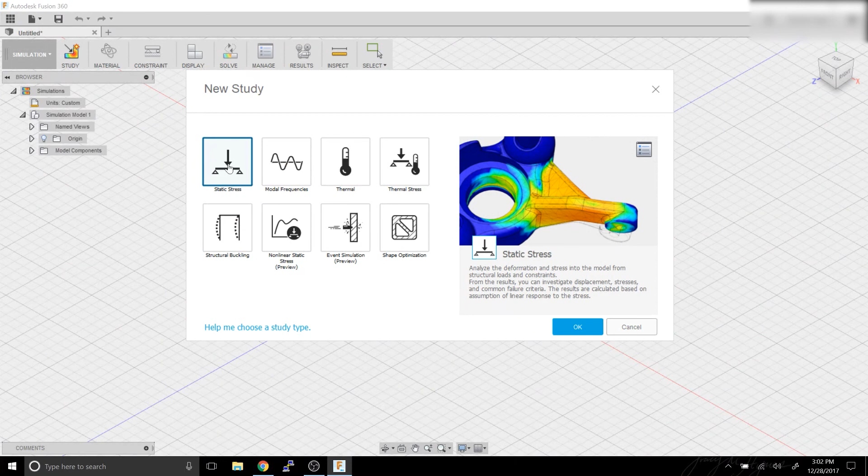So we're going to go ahead and mock up a quick test tank here. To do this, we're going to need to make the actual model, but before we do that, we're going to have to make a material. We're going to go to model and we're going to go to simulation. Static stress test is what we're going to be doing.

And under material, go to manage physical materials. Now the reason we have to do this is for plywood. Plywood is a complex material that this system just cannot handle for stress tests. There's too many variables in it, and we only really need a couple of them.

So what we're going to be doing is going down to wood, going to plywood finish, and hitting this little up arrow with the pencil, and that'll give us a copy of the plywood finish here. Now when we look at the physical properties of this, you can see it has separate X, Y, and Z properties, and they're identical for everything except shear modulus. And the shear modulus is whether you're going against the layers or into the ends. And we're going to be doing into the layers, so this is the one that we want.

So what we're going to have to do is make a material that has less properties so that this can actually work with it. To do that, the easiest thing to do is go to plastic, just pick something like the acrylic. Doesn't really matter what you pick. Ended up with acetal resin accidentally. Doesn't matter. Acrylic clear. And you're going to rename this to whatever you're going to end up using.

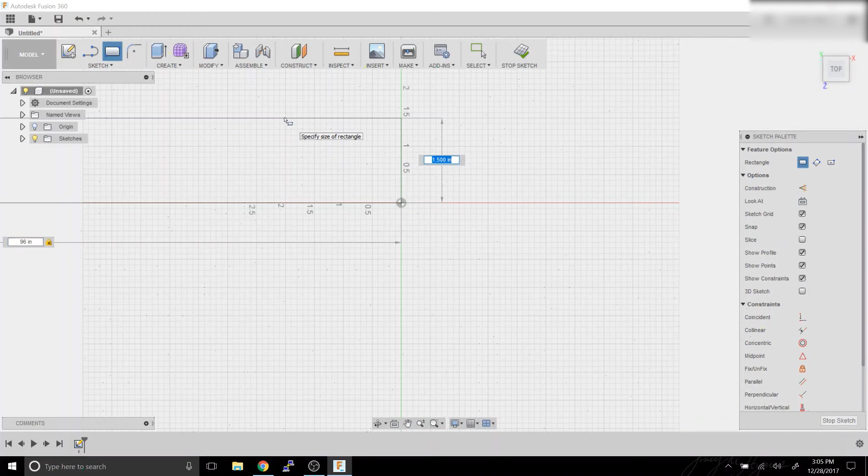So we're going to go ahead and start constructing our tank. We're going to create a sketch, and we're going to put it on the floor plane here. We're going to make a rectangle, first corner in the middle, and then we're just going to type in the dimensions. So this one's going to be 96 inches long and 48 inches wide.

Scrolling in the program is the mouse wheel. If you click and hold the middle mouse wheel, you get the pan tool. Alright, so we've got our base.

Now we need to make an actual base out of it. Normally when you do a plywood tank, you do doubled up plywood for the base. So we're going to go ahead and go to modify, press pull, and we're going to do a thickness that is 2 sheets of plywood. Now normally 3/4 inch plywood is actually 23/32, which is 0.71, so we're going to do 1.42. And that gives us, if we come up here to the home, a thick sheet for the bottom.

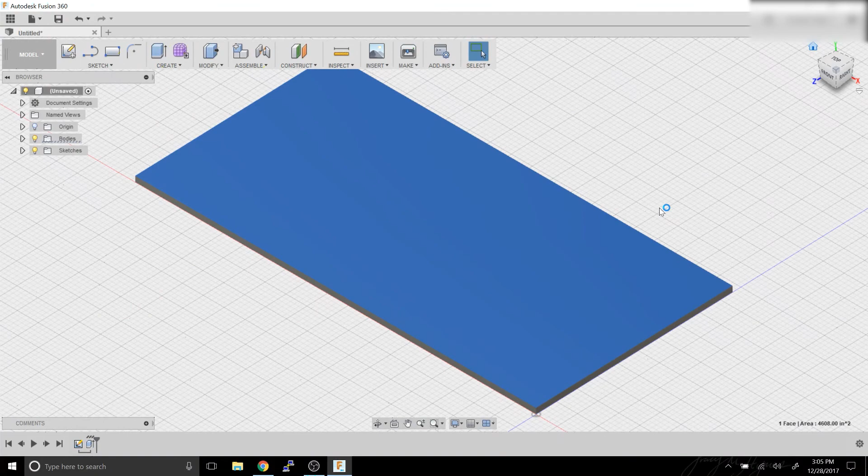I'm going to go ahead and do this again, sketch on the new top surface. And we're going to create a box that's the full width.

Then we're going to shrink that box down by the width of plywood, so we have a single plywood thickness wall. Now that's a bad idea, but I'm going to do this just so I can show you how this program works and how we can modify it later.

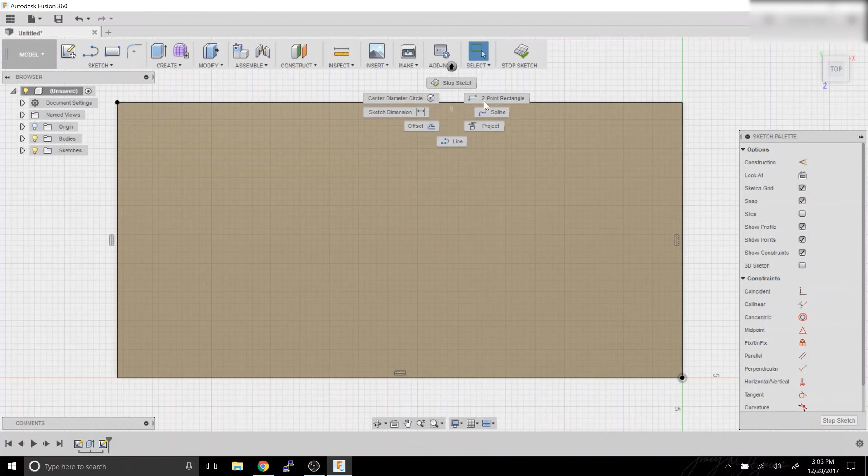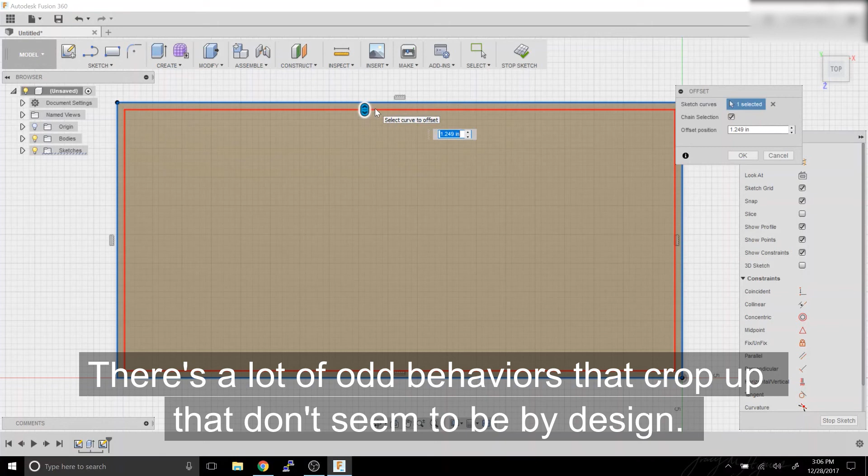You're going to right click anywhere, go to sketch, go to offset, and pick this box we just made, and we're going to move it in. Now, it's a good idea to move it manually by dragging so that you know if you need a positive or negative number, because the program does randomly assign that. We're going to go ahead and do 0.71 for our plywood.

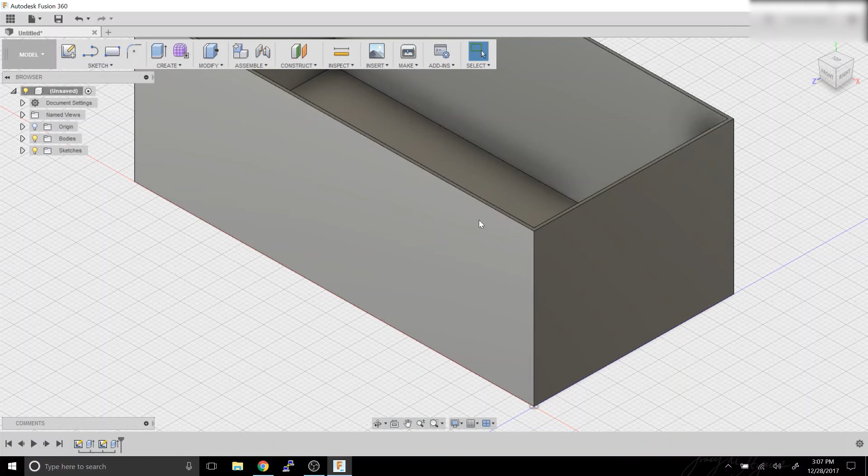And then once again, we're going to go to modify, press pull. I'm going to select this edge we just made, and let's make this tank 36 inches tall. That seems like a good number to me. Now at this point, we've got just a box. We need a window, or it's not going to do us any good.

So we're going to make a new sketch on the front of the box. We are going to try to come up with a good size. I like the idea of using a 24 by 72 inch window. That's a standard size of acrylic you can get. Now this is 96 inches wide, and we're not doing a uniform spacing, so I'm just going to separate this off a little bit. I'm just going to make a 12-inch box over here.

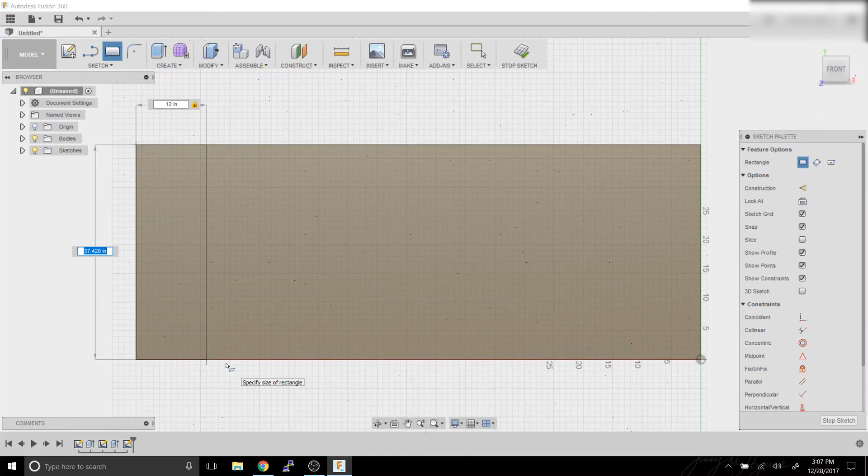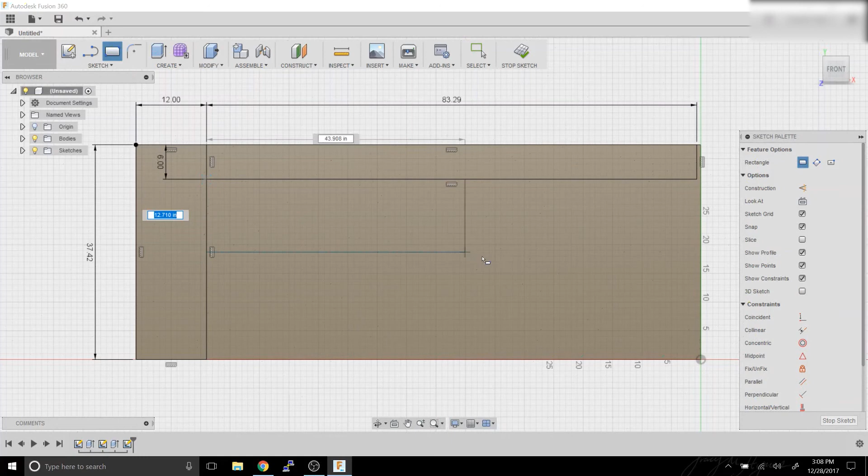36 inches tall from 24, so we're going to do a 6-inch gap at the top. Then we're just going to drop in our window starting in this corner. Now we're doing the size of the acrylic, not the size of the hole. So we're going to do 24 by 72.

That looks pretty centered. There's a little bit more of a gap on the bottom because of the 1.5-inch plywood, but I don't really want to factor that in. Now we're going to do the same trick we did earlier. I'm going to right click, sketch, offset, select this box we just made, and we're going to give this 1.5-inch lip that the window will actually be bonded to. So we're going to be working with this inside square here.

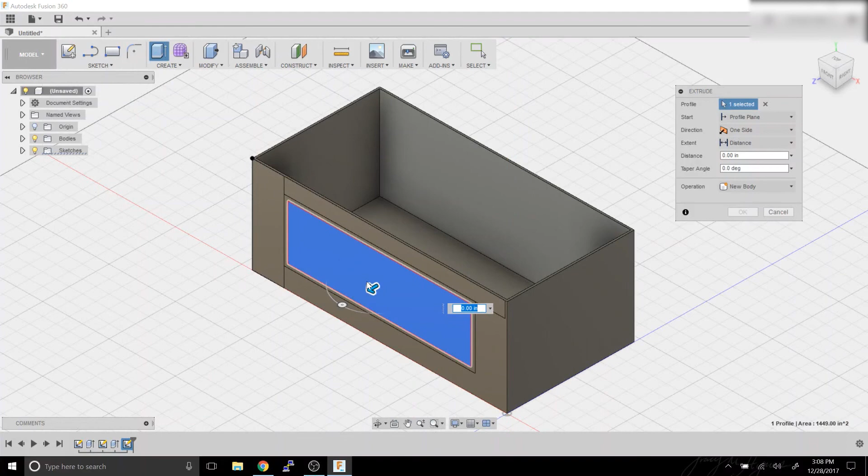Now, in order to cut, you go ahead and press pull. The shortcut key for that is Q. And you're just going to drag this the other way. It turns red, and the operation becomes a cut. And that'll give us a window.

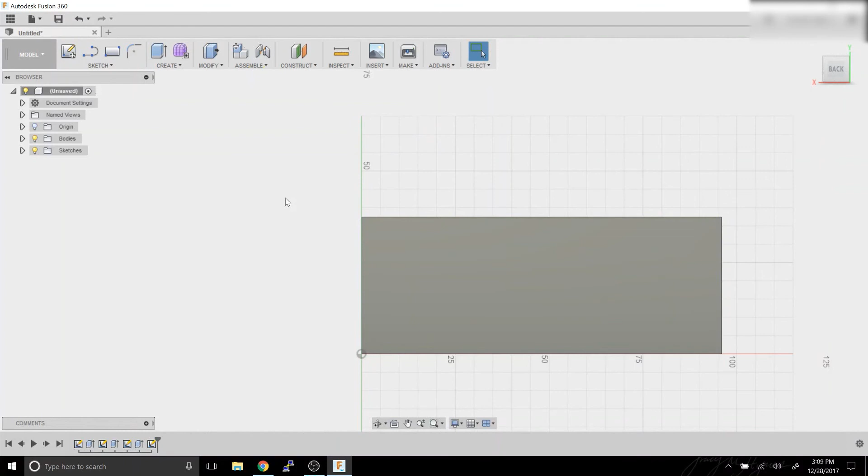Now we need to make our acrylic sheet, so we're going to flip the box around using the rotate tool down here. Hit escape when you're done to get rid of the rotate tool, and we're going to make a new sketch on the inside wall. Now, because this box is in the way and we can't really see what we're doing, we're going to go to bodies and turn off body 1.

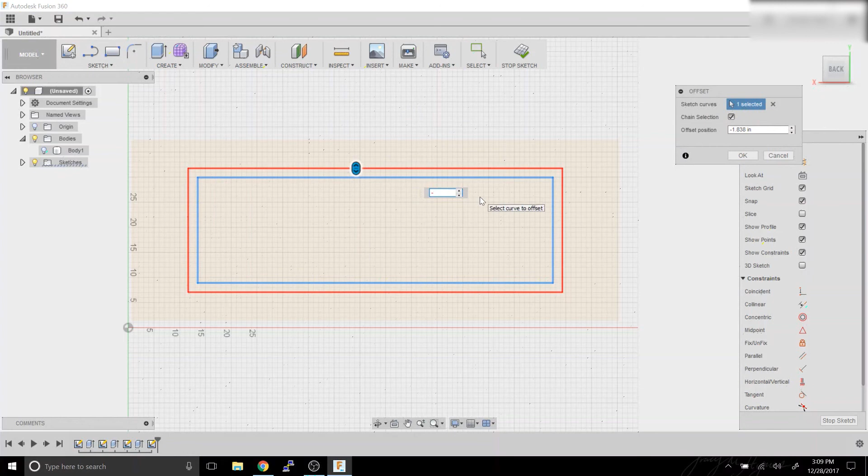Now, we've already got a selection here for where the hole is, and we know we need a window that's 1.5 inches bigger than that. So we're going to go ahead and go to sketch, offset. I'm going to click this hole that doesn't exist, and we're going to offset it by 1.5 inches, but now the numbers become negative. So negative 1.5, and that now gives us a 24 by 72 inch box.

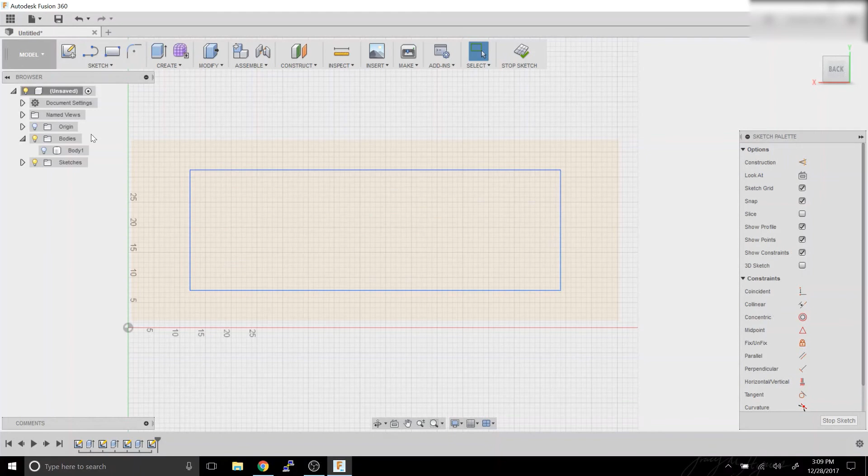Now in order to work with this, we have to select this invisible section in here and start deleting the lines, or we're just going to get a border. And there are 4 of them. So just go through and remove them. And we're going to turn our body back on. We're going to go back up to a view back here.

Now when we make the window, again you're going to press Q for press pull. Let's go ahead and make it 3/4 inch acrylic, so 0.75. And we want this to be a separate sheet or a separate unit than the rest of the body because it's a different kind of material. So under operation, we're going to change this to new body and hit OK.

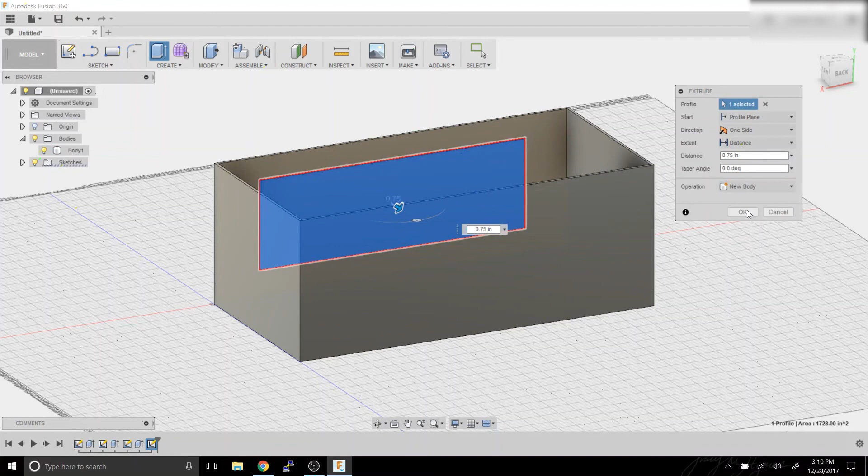So there we have our basic box. We now need to assign the materials to this so that the program knows what to do with it. So right click on body 1, physical materials, and we're going to go to plastic, acrylic clear, and we're going to drag this to the window.

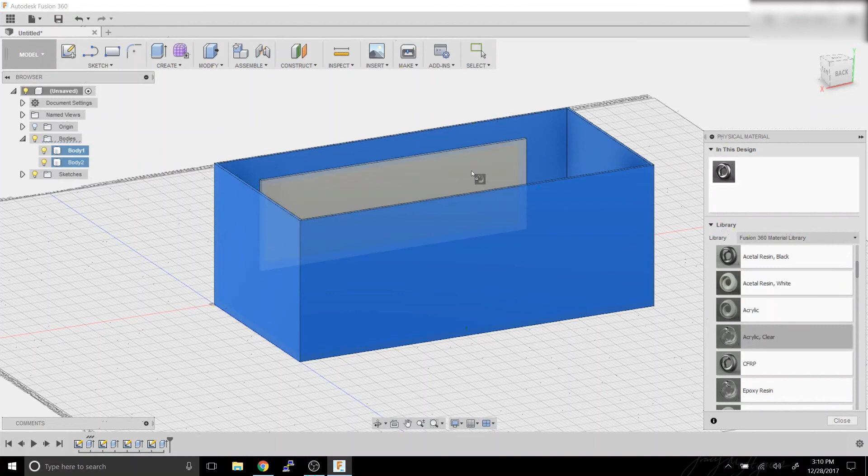The window becomes transparent. We're going to go up here to the library, go to favorites, and we're going to pick the material we just made, and drag it onto the box, so that the box now has the properties of plywood going through the plywood itself. So now we've got a plywood box and an acrylic window.

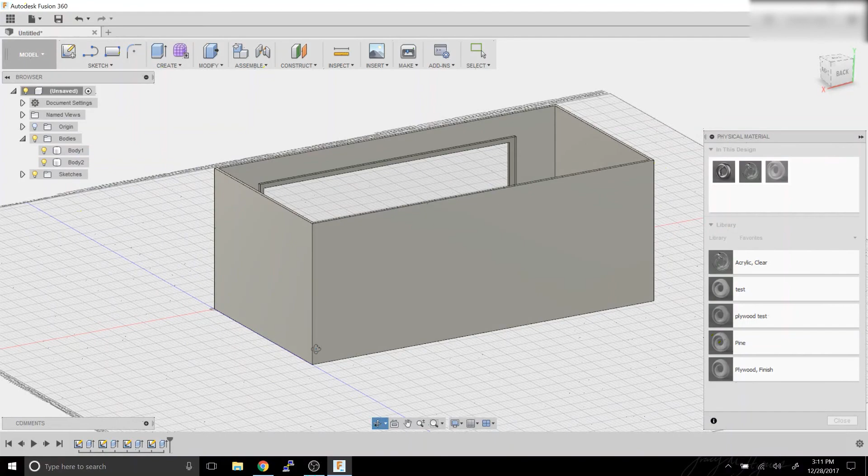We're going to go up to model, drop down to simulation, and we're going to start working on actually simulating some water pressure in this. So the next thing we're going to do is we need to add a fixed constraint so that the program knows where the base is and where everything else moves from.

To do that, we're going to rotate down underneath it. I'm going to select the bottom, right-click, structural constraints, and OK. We're going to leave it as a fixed.

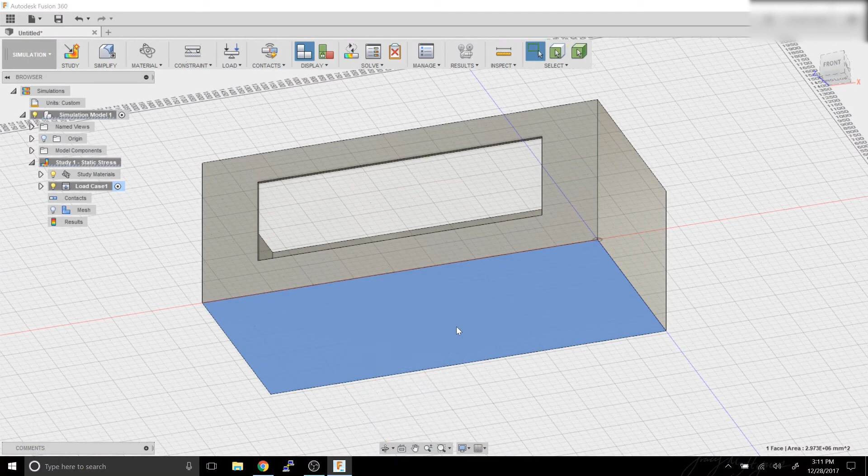The next thing we need to do to get this to work is to turn on gravity. So we're going to go to load case on the left, expand loads, and check gravity. If you don't do this, it will turn it on for you, but it will have a pop-up that annoys you with a little bong noise several times, which is a little bit infuriating in my opinion.

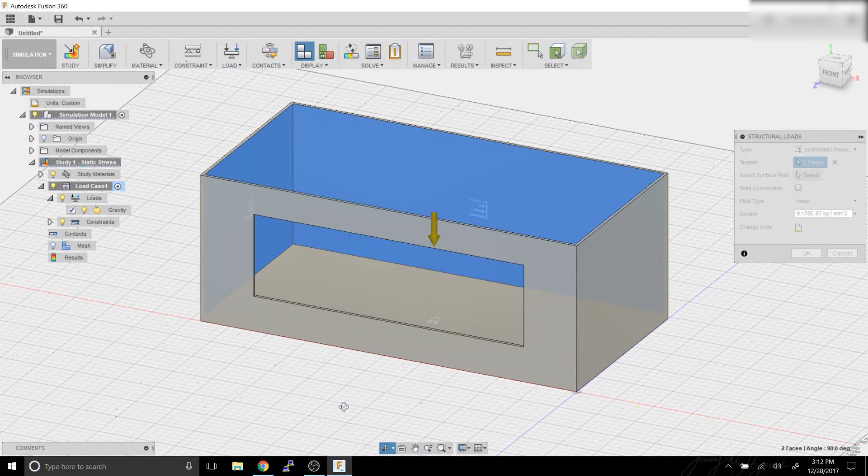Now we're going to actually set the water pressure. We're going to right-click one of these inside walls, click structural loads, and I'm going to change the type to hydrostatic pressure. Then we're just going to select all of the inside walls of the box and the inside of the acrylic sheet.

Now, if you want to model a stand underneath this, you can. At that point, you'll want to put pressure on the bottom, but because I'm doing this as if it was just sitting on the ground, pressure on the bottom doesn't change anything.

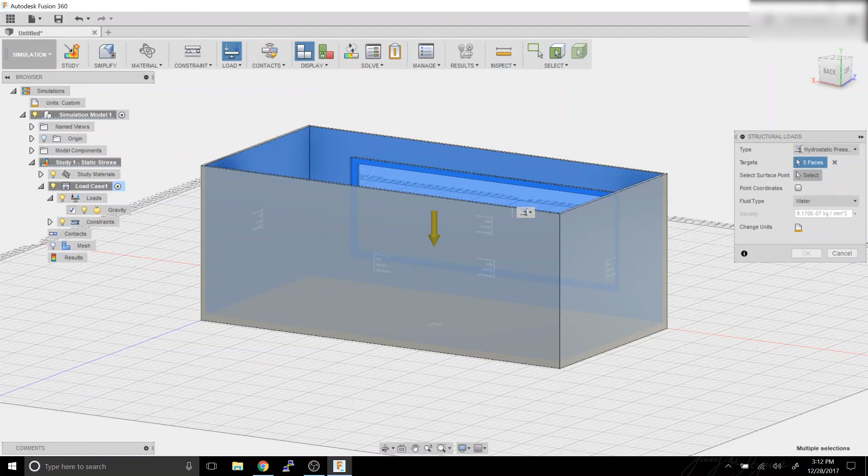The next thing we're going to need is our actual water level. Where in the box is the water going to be? So we're going to go over here to select surface point, and we're going to select an inside edge. Then we're going to drop this down, let's say 4 inches. 4 inches from the top is a good number. Now we've got a basic simulation for water pressure set up.

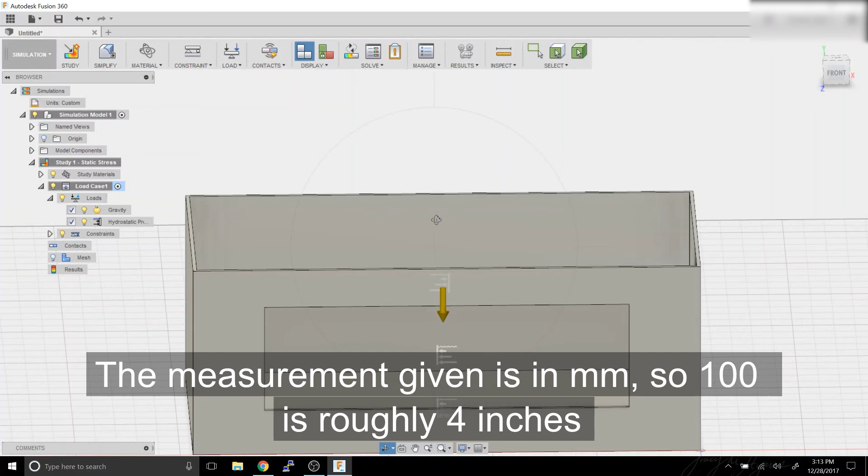We can go ahead and try to solve it. Now, when we hit solve, it's going to give us a warning, and this is because it doesn't know what to do with this window, which is a separate body, so we're going to go ahead and click automatic contacts. You'll also have this problem if you build a separate stand underneath.

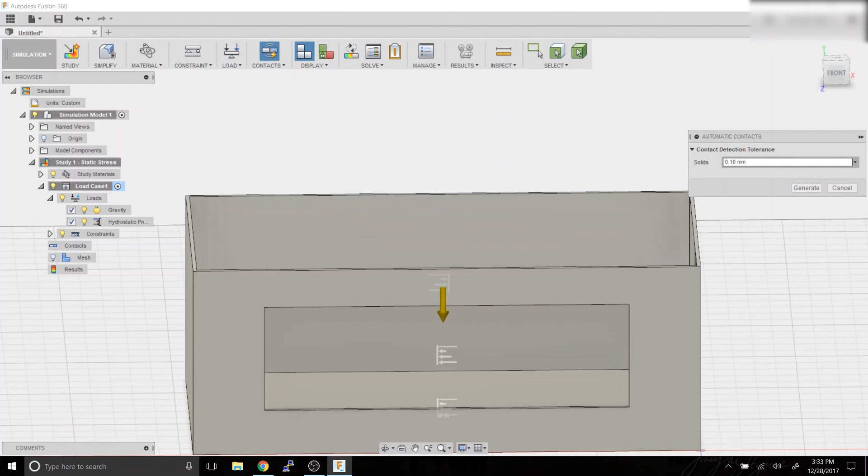When you click that, it's going to say anything within 0.1 millimeters is counting as touching, which is fine. We can go ahead and do that. And we'll go up here to solve again. It's going to make us save the project. Well, solve. There we go. And I'm going to name this garbage because this is going to fail as far as what I'm considering to be okay.

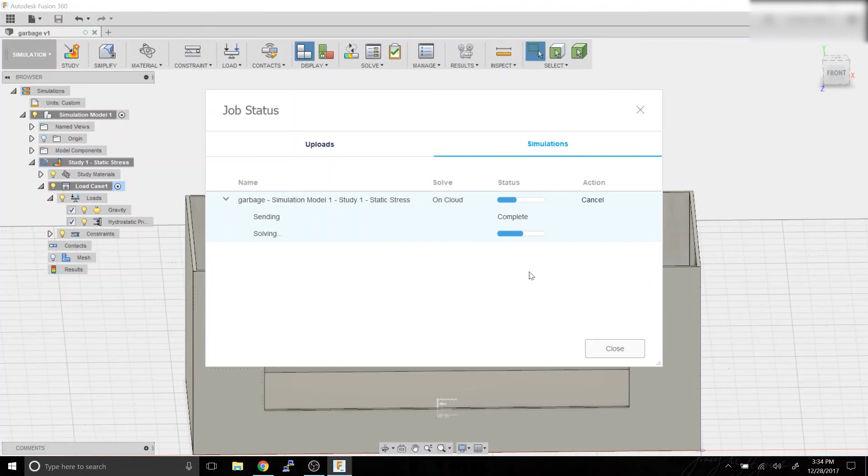Now, this usually runs pretty quickly for simple stuff. It can take forever on more complicated things. The more supports and things you put in, the more complicated the actual solutions are. So this one I'm going to go ahead and let through. Once we make the modifications to the tank, I'm going to end up cutting that later.

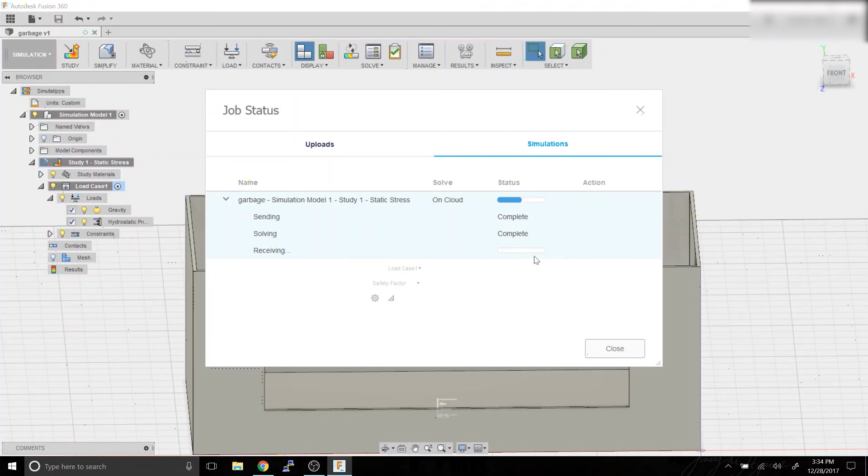But when you hit solve, it will, on the free accounts, upload to their servers. It'll solve it on their end, then re-download it. It has a local solve option, but it doesn't seem to work very well, and I don't really know why. My main editing system is a really beefy system. I've got 32 cores in it, 128 gigs of memory, and it still just panics and craps its pants and doesn't tell me why. So I just use the On Cloud. It is free for the free account, so it doesn't matter.

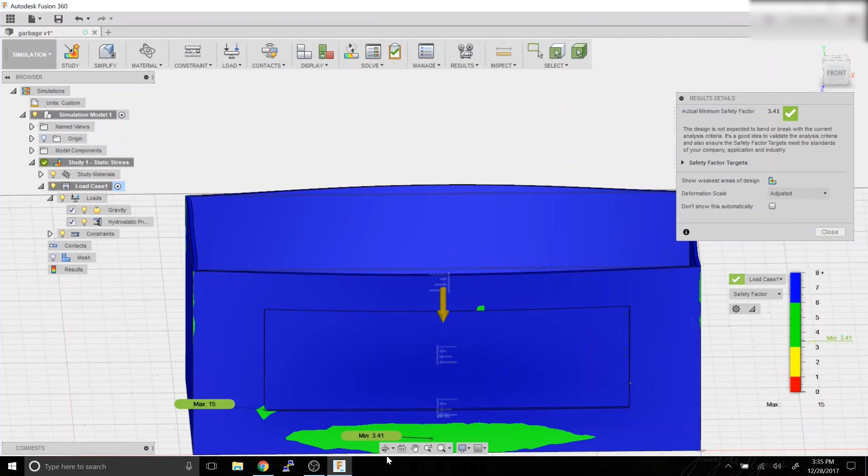Okay, so this runs through, and we see this particular tank has a minimum safety factor of 3.4. This is not good enough. If this were a full accurate simulation, 3.14 or 3.41 would be fine, but because plywood has some weakness, has some bubbles in it, because all of this is really being held together with glue and screws, 3.41 means you're probably going to have a failure point in this someplace, especially maybe on these corners here.

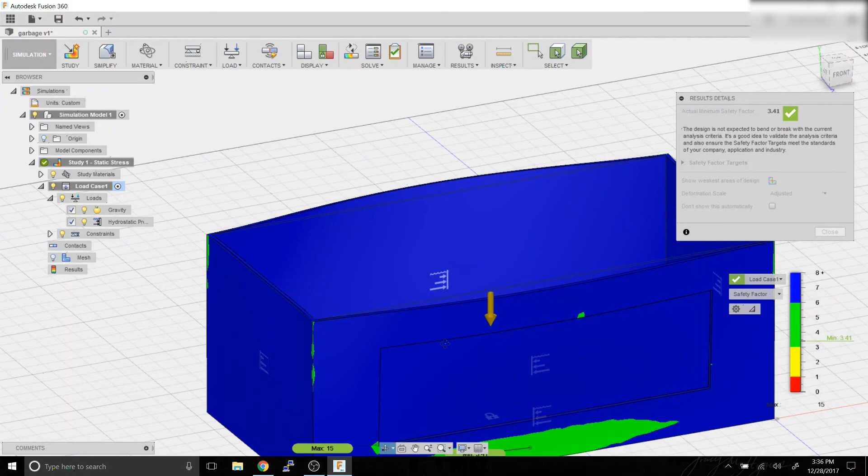So you can see the base down here where the wall connects, there's a lot of pressure. The corners, there's a lot of pressure. And down in front of the glass, there's a whole lot of pressure. There's also a spot up here at the top where there's a chance that you'll just end up with the supports breaking because of the bowing that the wood will do.

So we want to fix this up. This is something that I consider a bad build, in my opinion, with this program, because of the irregularities in plywood, because of the flaws and things that can exist naturally in the material, we want a minimum safety factor of at least 9. Now, that's not showing on this list here because it's 3.41. It goes up to 15. Anything higher than that, it doesn't bother to study.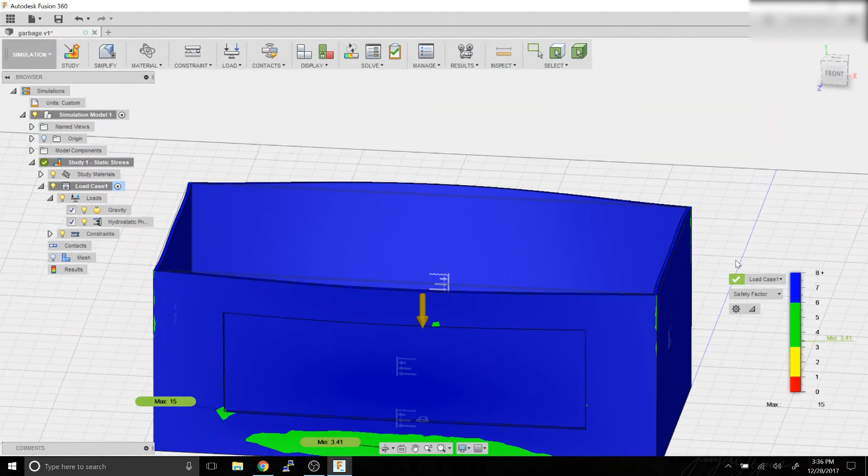So we're going to pop back to the model, and we're going to go ahead and make some quick modifications to this. The first one we're going to do is just put in a base plate all the way around that will give us some better support on the bottom of the tank. So I'm going to go ahead and create a sketch on that inside wall. I'm going to hide the body. I'm going to go ahead and make some 2x4s down here.

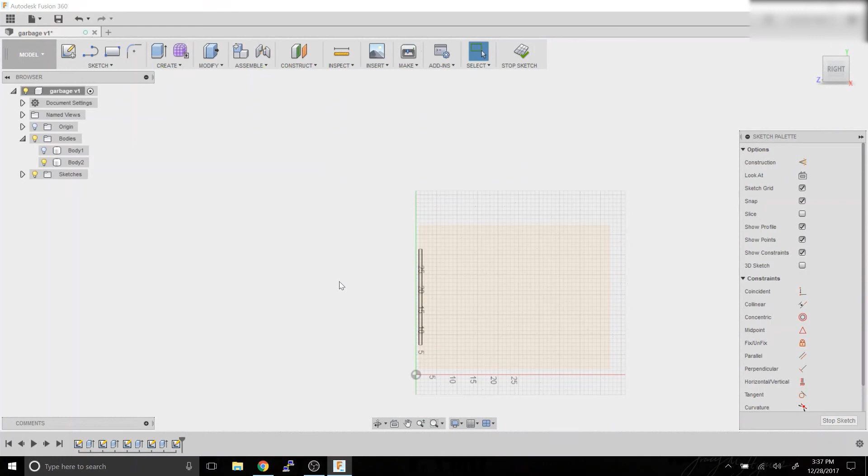Now, 2x4s, also one of those things that lies about the size. So we're 3.5 inches tall, 1.5 inches wide. Go ahead and make another one on the other side.

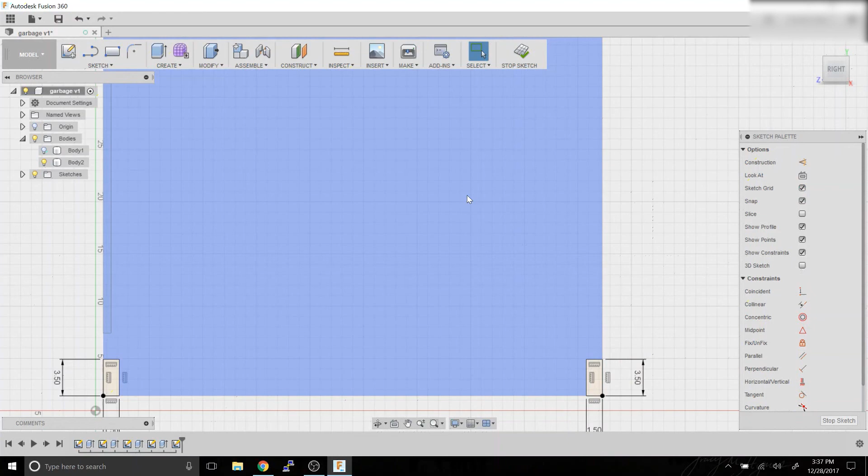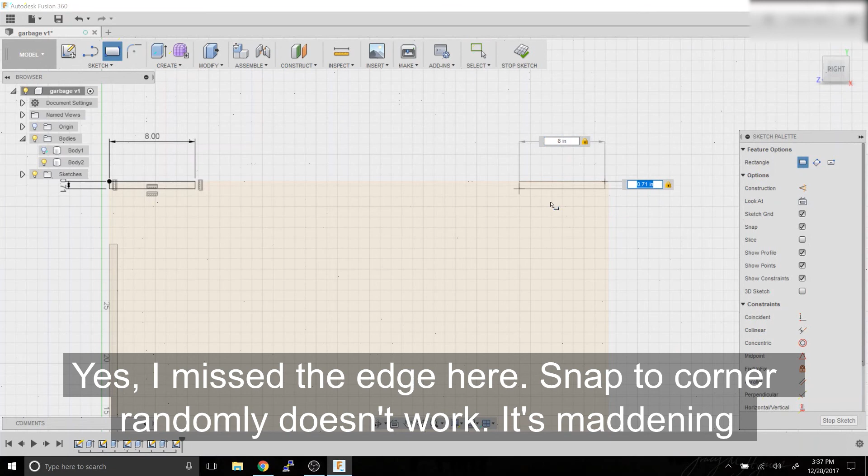On the top, I'm going to add some plywood supports. I'm going to make these 0.71 inches deep and 8 inches wide. Put our body back on.

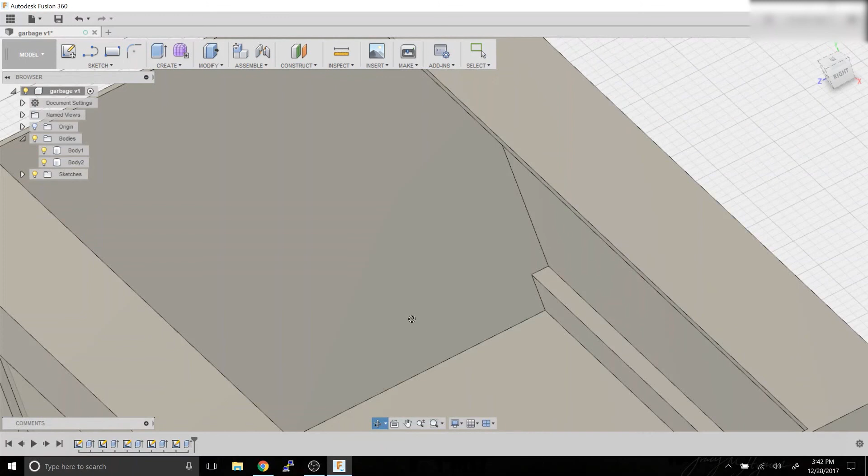Next thing we're going to do is add some top support braces on the side, in the middle, and on the side over here. We're going to create a sketch on the inside edge of this. Again, hide the body.

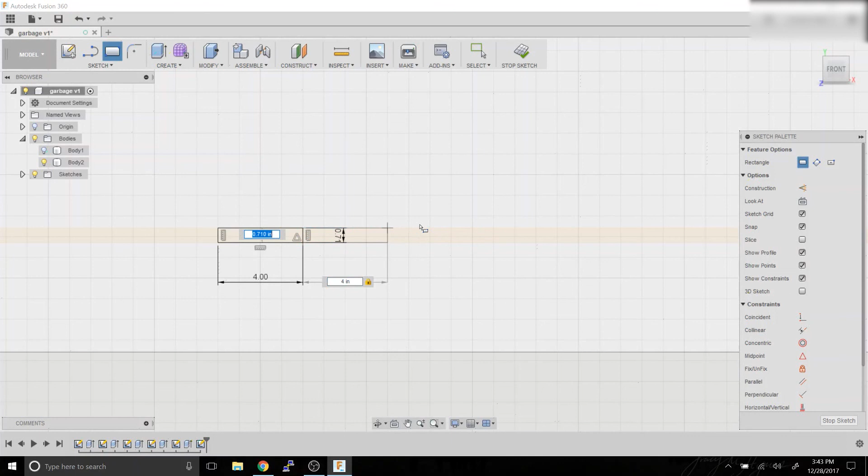Do one on each side. For the middle one, I don't feel like measuring this out, so I'm going to go roughly where I think the middle should be. You can see this triangle here, and this is the actual center point. So now I can just do 4 inches either side of this, and that gives me an 8-inch piece in the middle. Turn that on.

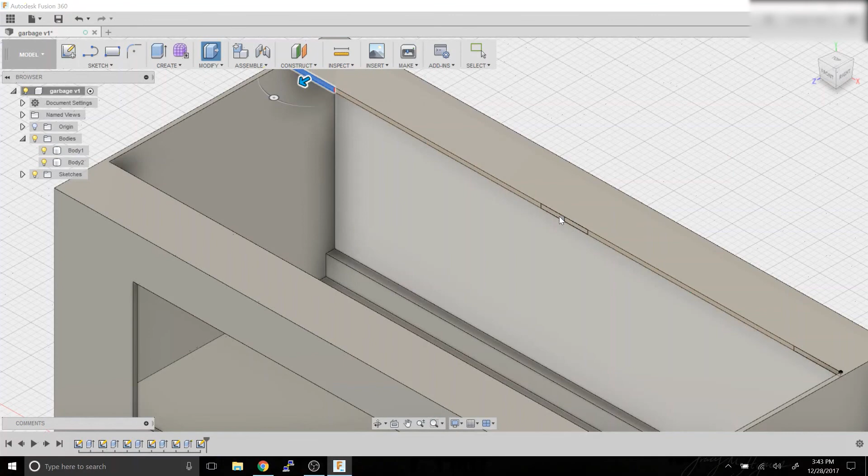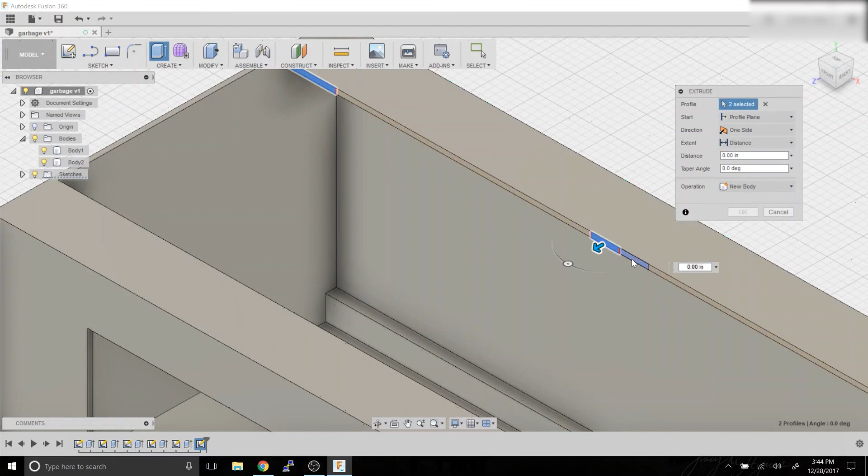Sorry, we need to know how long it is, so inspect. Inside edge, 30.58. Again, make sure join. Done. So now we've got a solid top support.

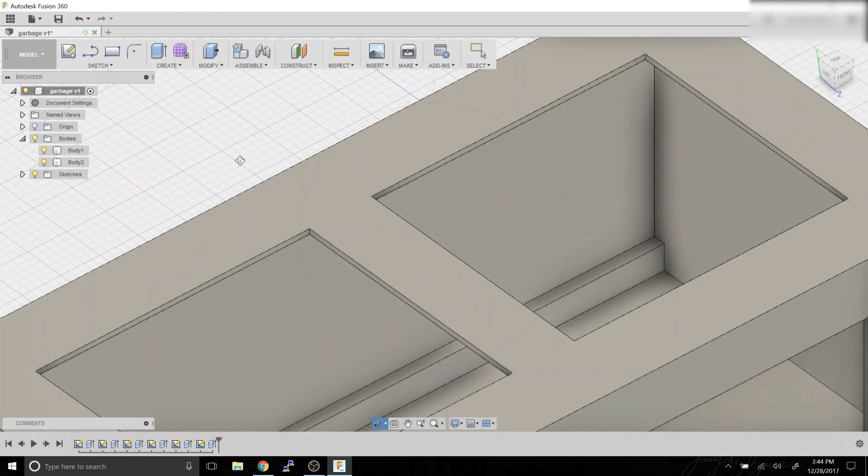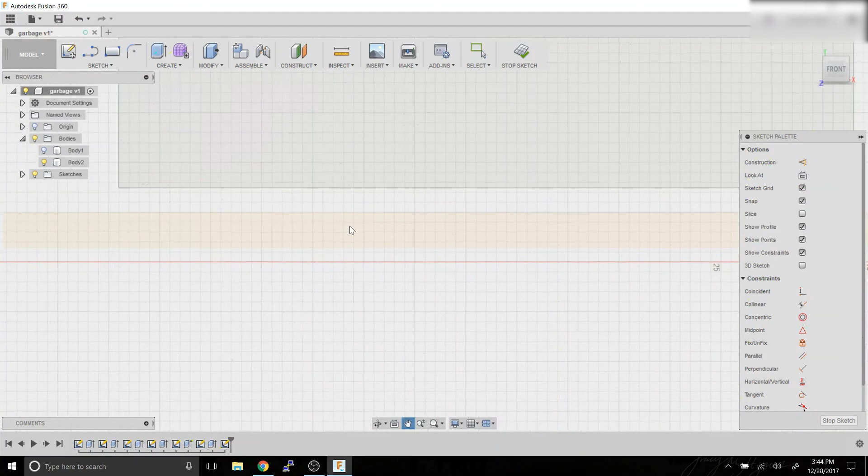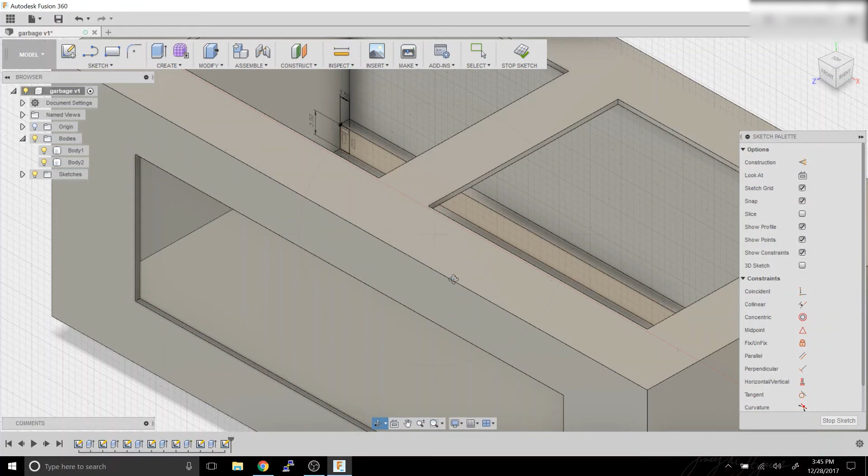We need supports on each edge on the bottom so we can complete the box. We're going to make a sketch here, hide the body. Go ahead and find out how long it is. Looking at 43.58.

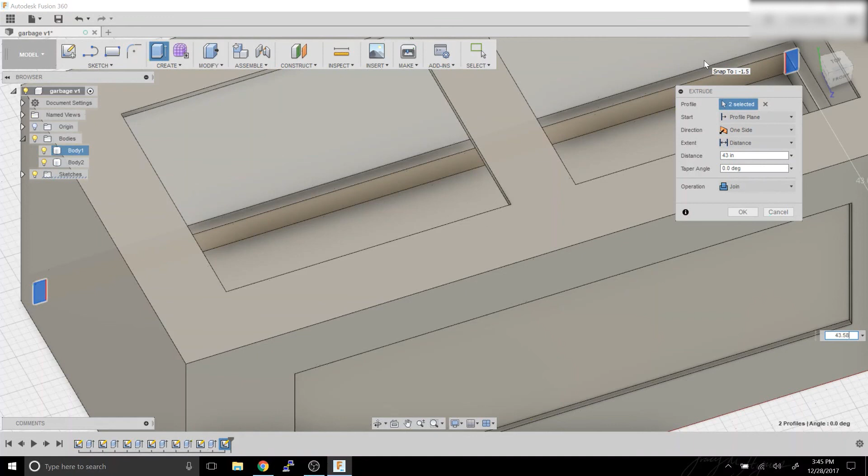Obviously, if you're making this out of real wood, you're not going to have that level of precision, but you have to do it for this program. Then let's go ahead and run up some supports in the corners and one in the middle.

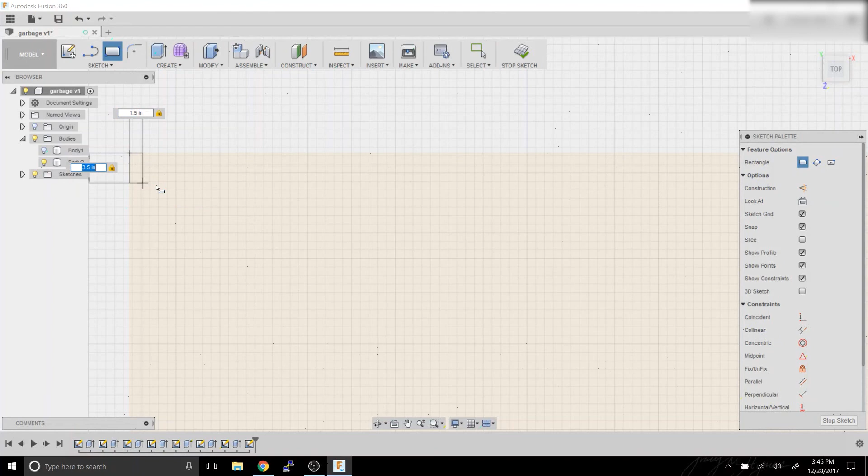That didn't go all the way back. Now it does generally snap to the corner, but again, it sometimes just does what it feels like. This is probably the most infuriating program to work with that I do, but it is the easiest for running these kinds of simulations, so I'm a little bit more forgiving with it than I otherwise would be.

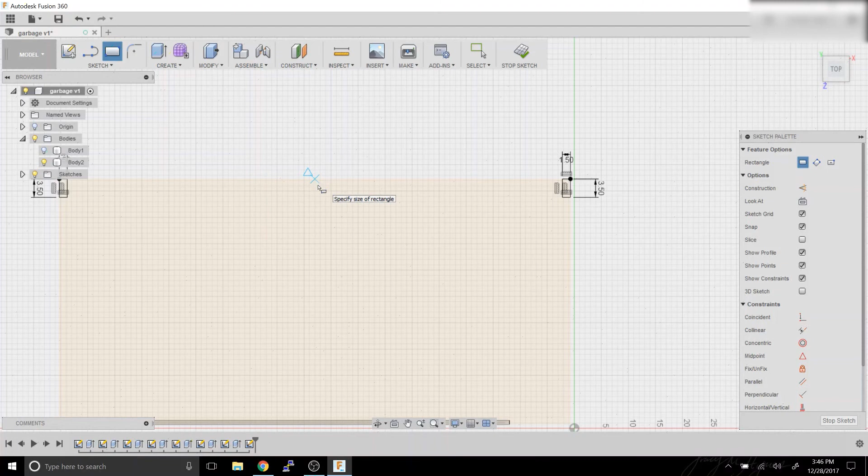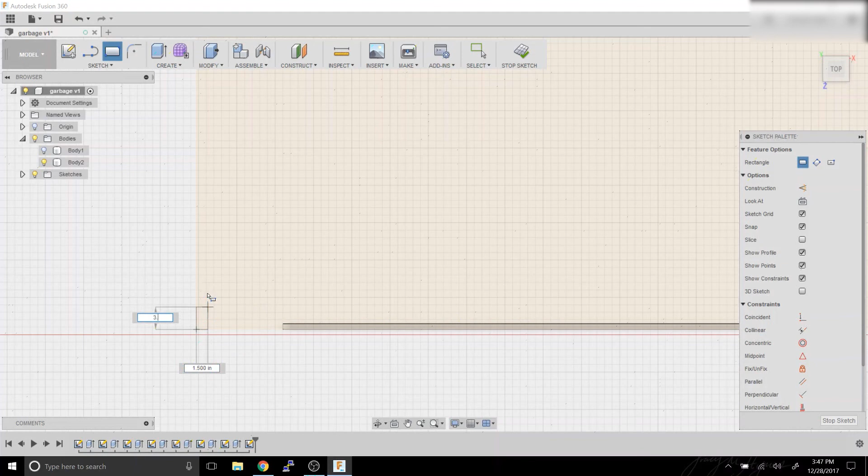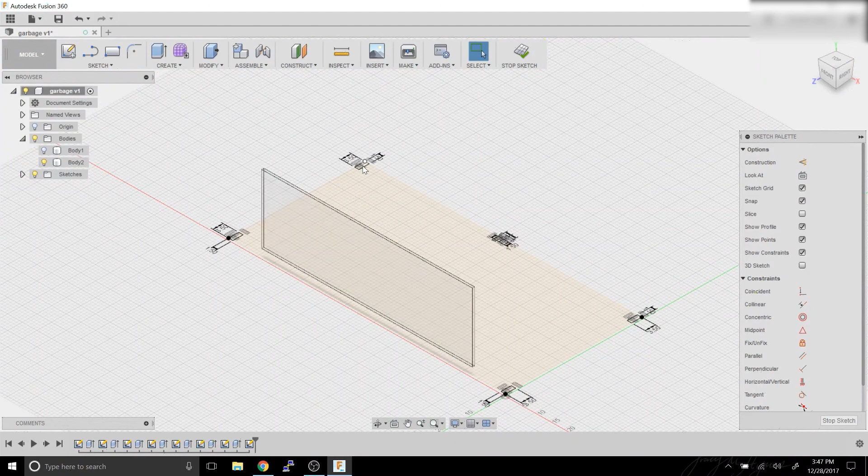Then all of these should be pulled out to the same length, so we just need one measurement: 31.79.

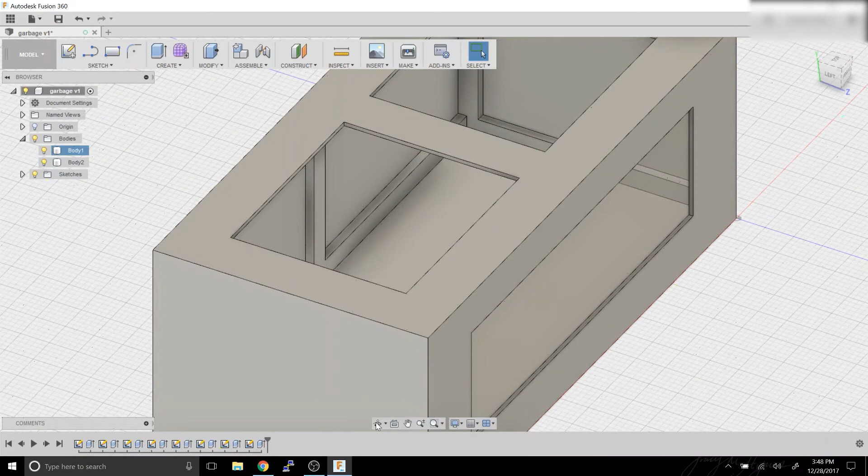Okay, so now we've got supports on all sides of the box on the inside, so the outside looks nice and clean.

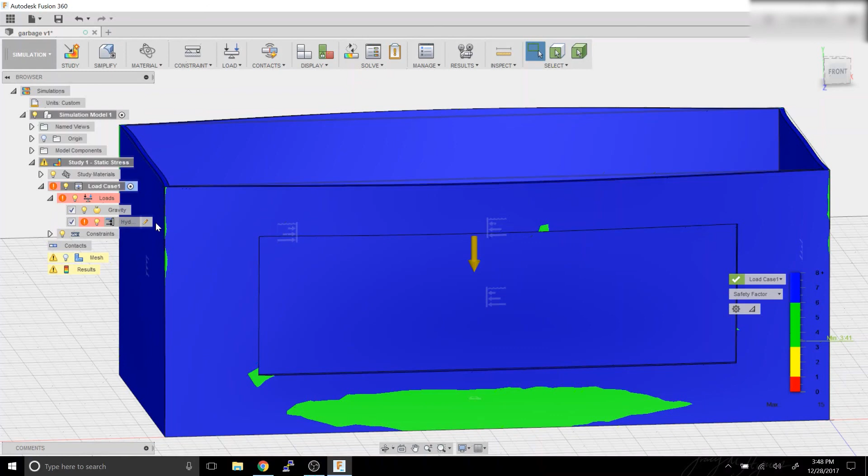Come back to simulation, and we've got an error. This error is because when we added these top supports, you can see in the old model that's still here, there were no top supports. When we added the top supports, it moved our surface point, so our surface point for the water no longer exists. So we need to come in here and try to set a new one up.

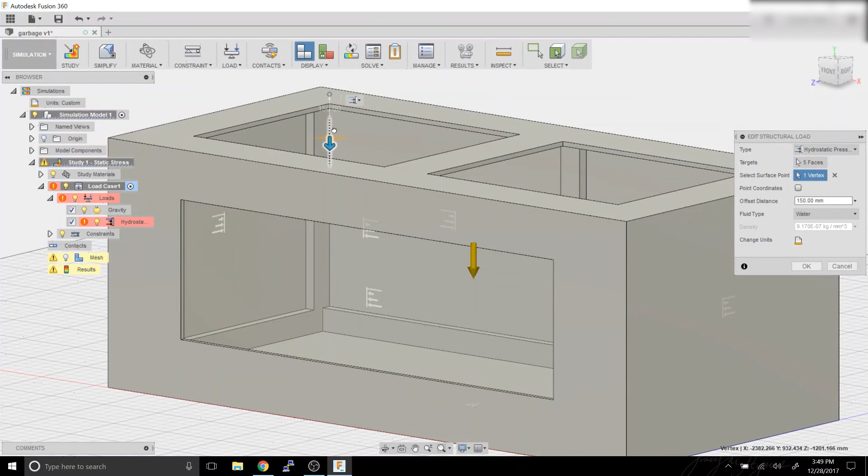You want to make sure that you get the inside edge of this if you can. You just have to move it until it clicks to where you want it. We're also going to add these pieces of wood to the water pressure faces so they get interacted with correctly. And we split the back face into two, so we have to reselect the right side. Why did it ding? Your guess is honestly as good as mine.

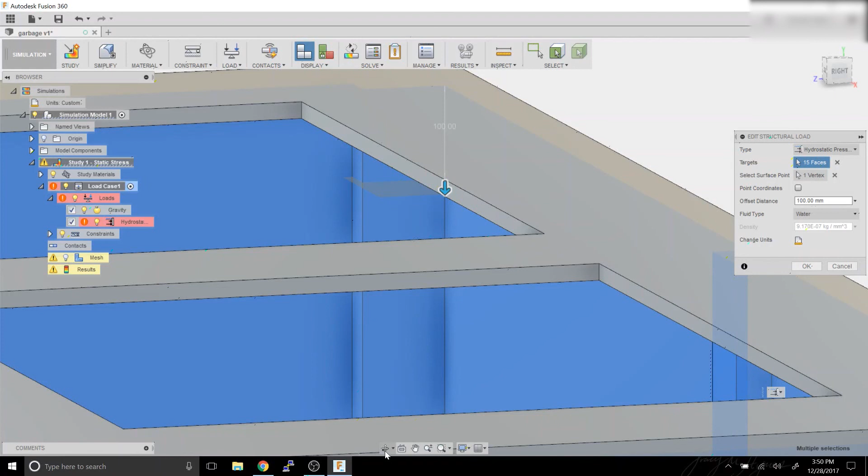And then we don't need to do those because those are pressing into the wood, but we do need to do the front face on this one. Okay, that's it. Now we've got 16 faces, our water pressure is set again.

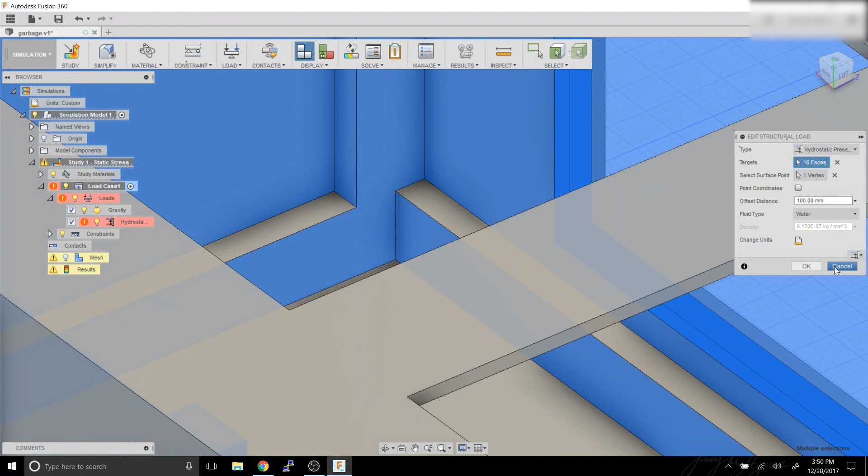We can rerun the solution using the new supports that are added. Remember with all of these things that anytime you add supports, it's going to basically be screws and glue holding it together, so make sure you add more than you think you need. Doing some fiberglass around the outside edges to hold everything together is generally a good idea. Don't expect your corners to be what this thing says.

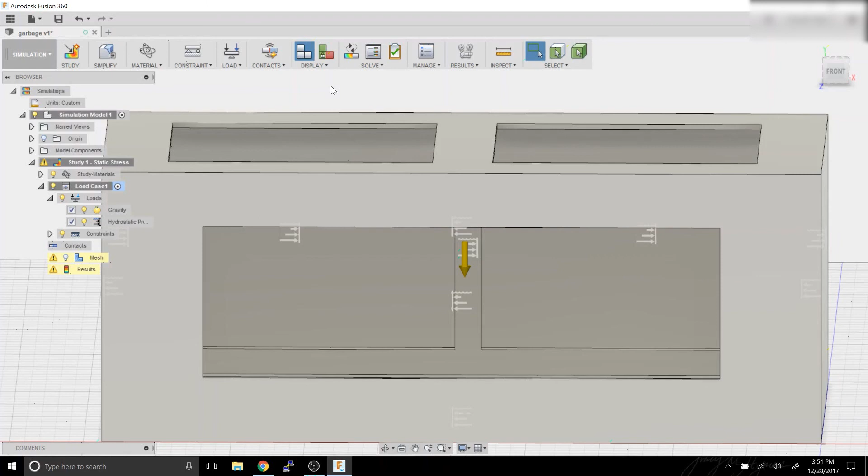Let's go ahead and run a quick solve on this and we'll see what kinds of improvements we made. This one's going to take a while, so I'm just going to cut here and come back when it's done. And we're done. You can see we've bumped our minimum safety factor up to 11, which is well within the range of safe to work with stuff.

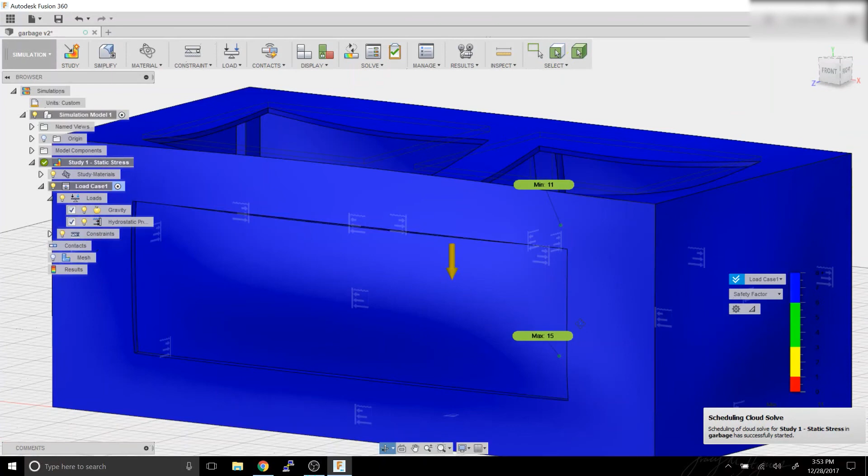Now, this box still looks pretty bulgy. It looks like there's still a whole lot of bulge in the window, a whole lot on the sides, a whole lot of the frame. So I want to show you what this actually relates to using some of the tanks that I've already made.

I'll go ahead and load up my grow out tank here.

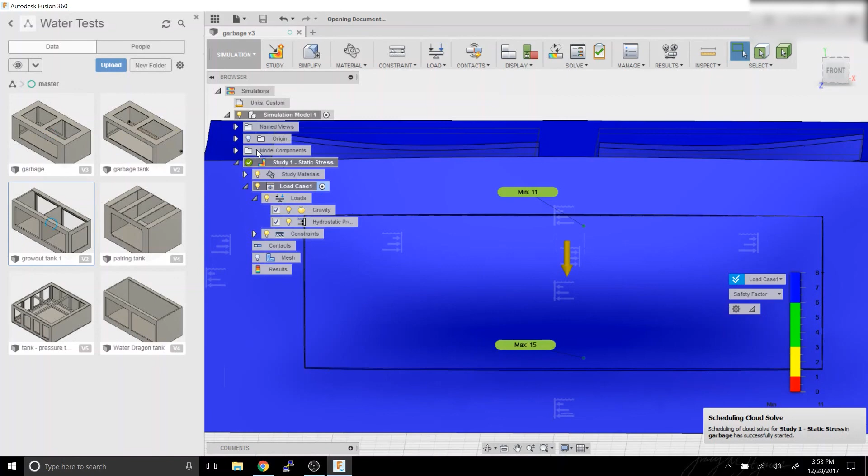This one is 3/4 inch plywood with additional 3/4 inch support around the outside here, along the entire front face, and then a 3/4 inch bar down the middle separating it out so that I can keep different batches of fish separate.

And I just have a siphon running over this to connect the water so that I can do constant drip water changes. I'm going to go ahead and put up some footage of the actual tank here.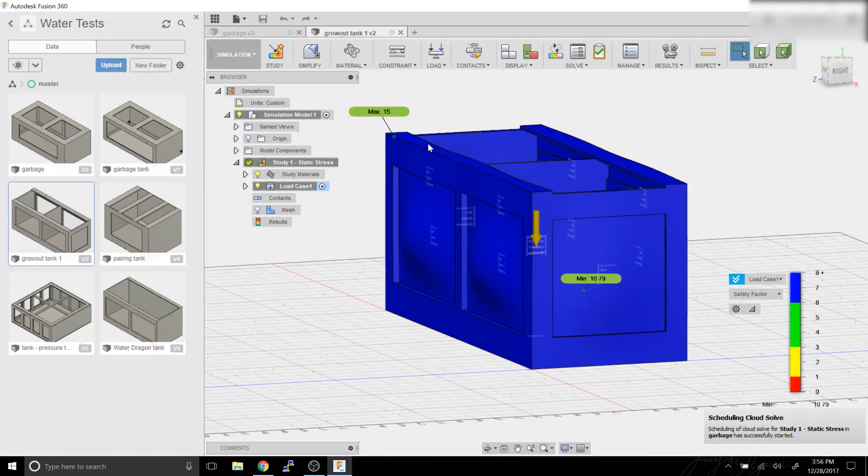You can see, comparing this to the model, that there's basically no bulge in anything.

Now, there is some lensing in the windows. If you get within an inch or two of the windows and look to the side, it's a little bit distorted. It can kind of give you a headache, but as long as you're more than 9 inches away from the tank, you don't see anything.

Now, my pairing tank is the one that I have a lot of my more recent videos in. You can see here, the entire box looks like it's bulged out. Not just the windows, but the frame, the plywood, the top supports, everything.

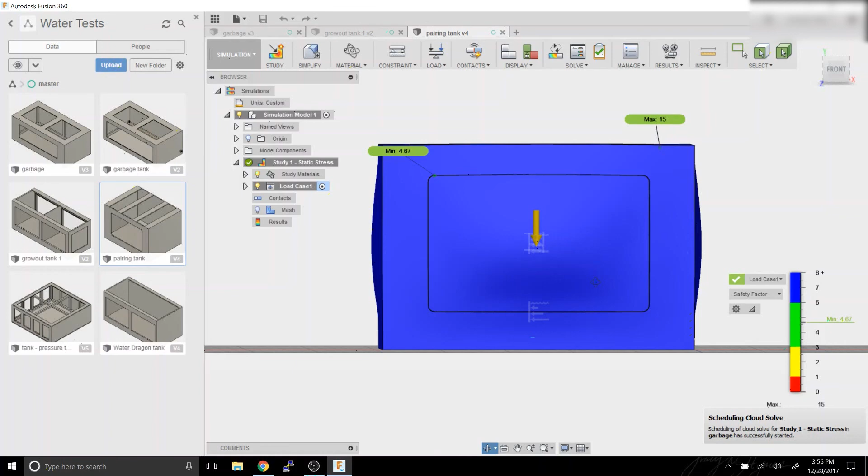And you can see here in the actual pictures that there's nothing at all, the slightest bit bent anywhere. Again, there's a little bit of lensing in the picture, or in the window itself, but it's not bad.

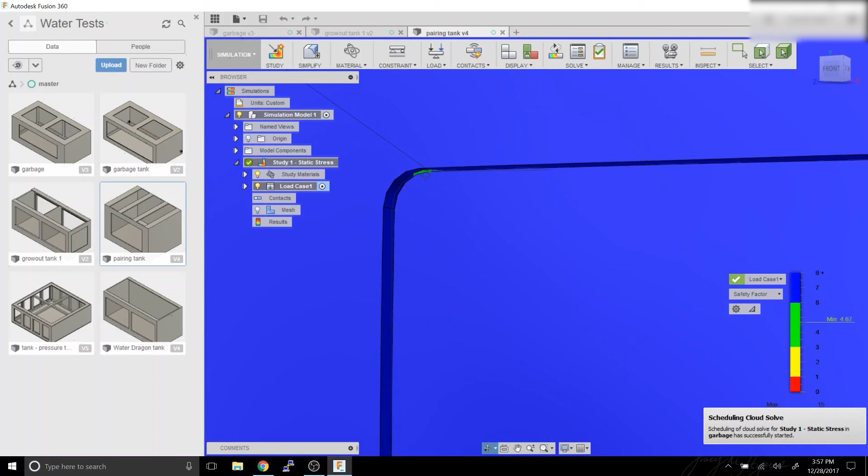This one has an odd spot on the model where it has decided that this little tiny section on the inside edge of the window is not quite good enough to be considered what I like, but I genuinely think that's a fluke of the calculations and not an actual problem with the tank.

I do keep the water a little bit lower than I had in this calculation, so that's probably fine.

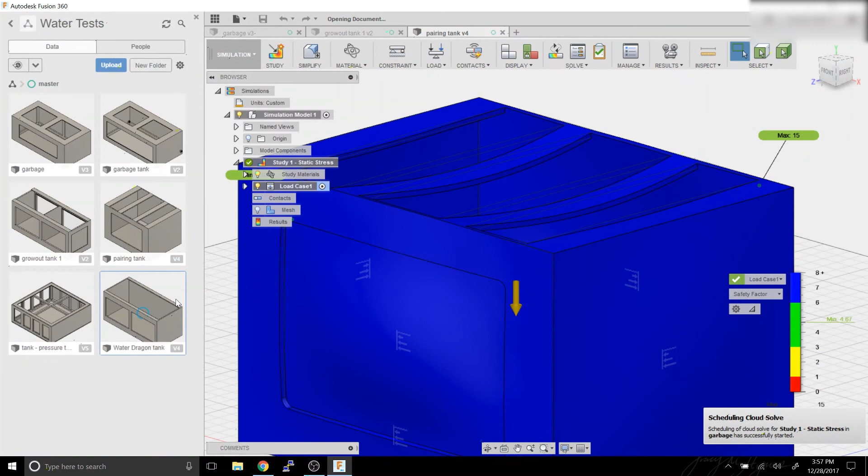My Water Dragon tank is the one that I mentioned in my epoxy video, that before I added top supports it just splayed out horribly. This is with the top supports. It was completely rigid with that.

You can see this in some of my earlier videos. I've since gotten rid of it. You can see again the eyeball effect of the acrylic. This uses 0.22 inch acrylic. It's less than 1/4 inch.

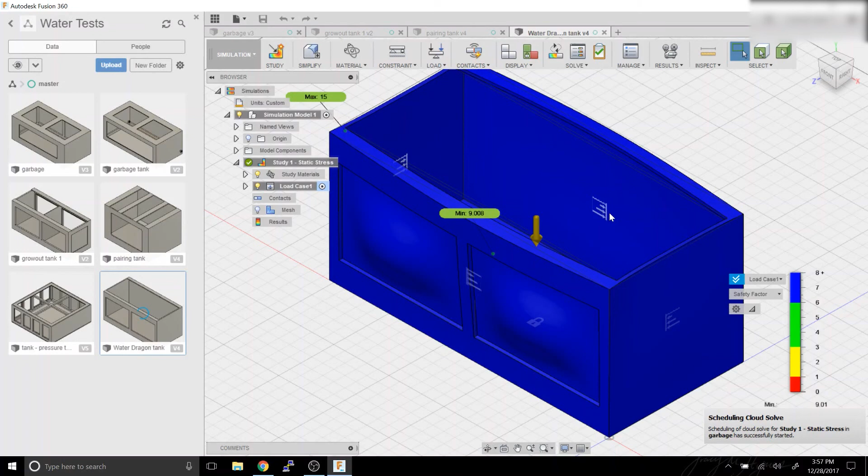The windows were 16 inches tall by 22 inches wide, and the 0.22 inch acrylic worked fine for that. There was, again, a noticeable lensing if you're close, but genuinely I think you're going to get that no matter how thick you go, unless you're going to 2 or 3 inches thick.

Now, the last one I want to do is the 2,300 gallon tank that I'm working on. This one, you can see there's some major lensing going on in the windows.

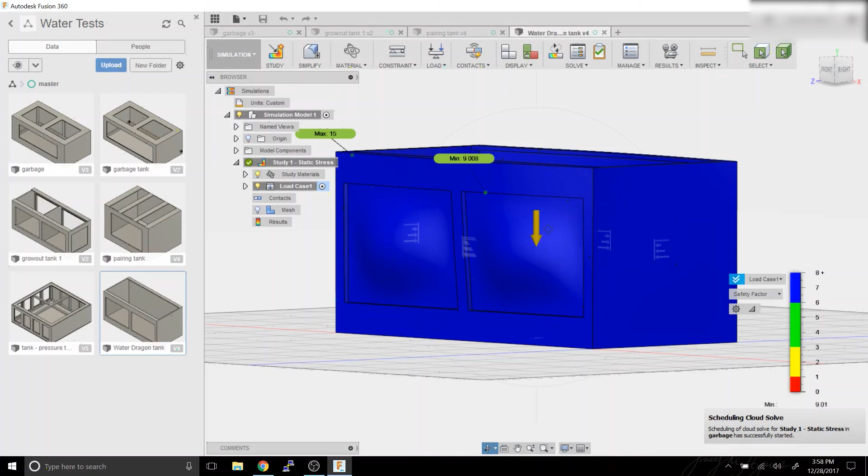Again, looks like eyeballs, but there is nothing on this one that is below a minimum safety factor of 15, so even though there's going to be probably a fair amount of lensing going on in the acrylic, it should all hold up without any issues. There shouldn't be any breaking or tearing or anything else going on in this.

So this is a tool that I found indispensable in designs more than anything because it gives me a good idea of where the pressure is going to be and where I need to be adding some additional supports.

So this one here had all sorts of failures, and the way I got around that was adding 4x4s every 24 inches on the inside supports, adding another 4x4 around the rim in here, another one around the rim in the base.

And that was enough. Now this thing is just a rock-solid box, nothing's going to happen to it, and that's the spacing that I was going to be using for the windows anyways.

Because this way I can use the cheaper $30 each windows instead of having to go with larger windows that are going to run me about $400 each.

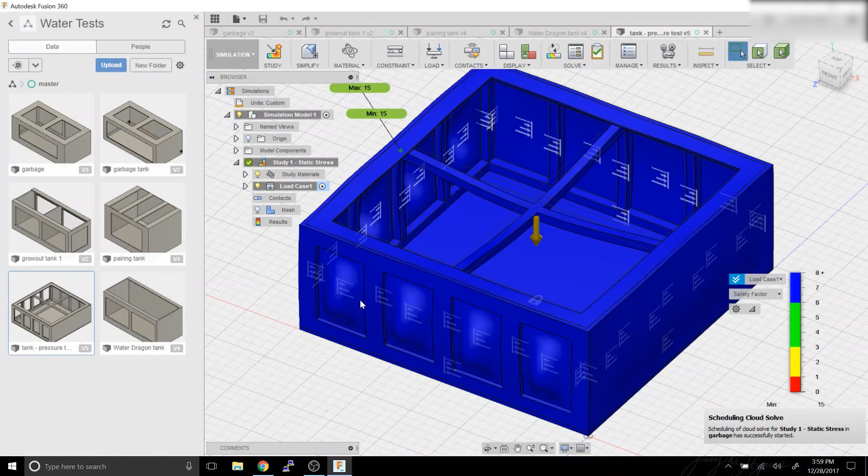It's a useful program. Hopefully it's something that you guys will be able to use, even if it's just for a one-off project. It's pretty simple to use once you get used to what you're doing.

I've laid out everything you need to know to be able to put in the stand here, to be able to use glass. You just choose a different material.